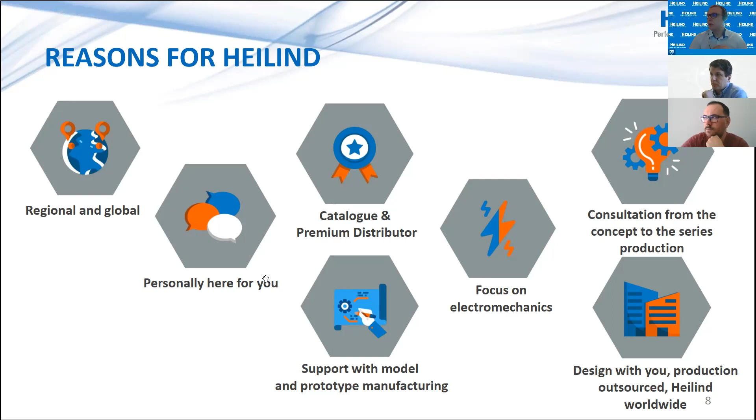We also support prototyping, so if you need any samples for your application, normally samples are free of charge. Let us know, and we will ship small quantities to our customers.

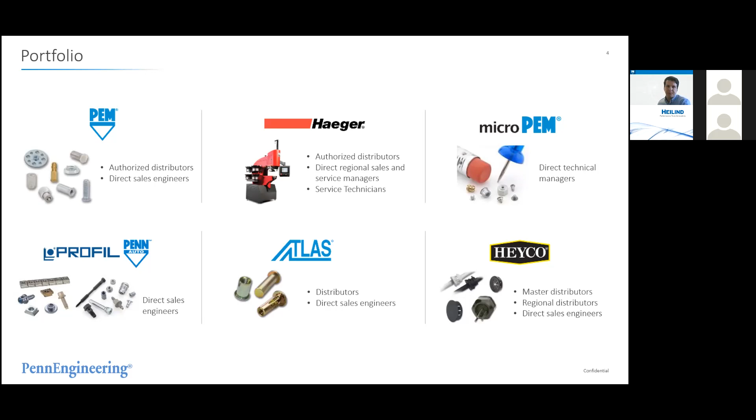The message here is really that we are a company that is very stable, very strong, with a strong focus on the customer. We are working and cooperating with the leading brands on the market.

We are constantly trying and developing new products. We are improving ourselves, looking at ways to improve total installation costs for our customers. We work closely with customers to identify solutions where we can reduce cost by replacing components or using better solutions.

With self-clinch fasteners, as you will see in the next slides, our fastener footprint is smaller compared to competing technologies. So we are also reducing the footprint in customer applications, which is very important, particularly these days where the trend is toward thinner panel thickness, meaning less space to install fasteners. Our fasteners are really the ideal solution for this type of challenge.

We also have a very high focus on environmental issues, with a dedicated section on our website where we show our certifications for various standards and requirements on the market, starting with ROHS, REACH, and other environmentally related issues. If you don't find what you're looking for, please let us know through our Heilind distribution partner or directly, and we'll address it.

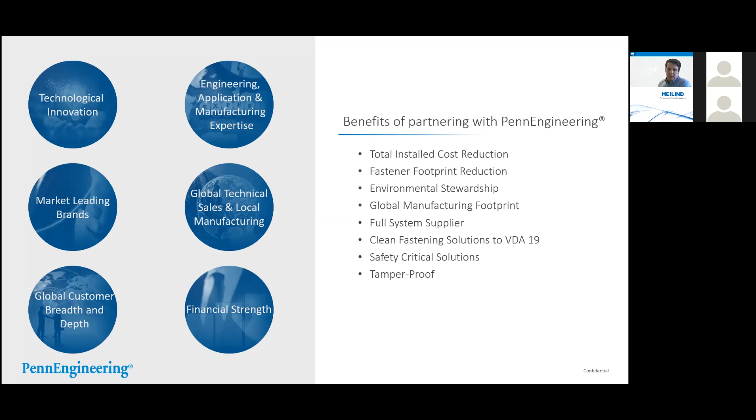Then we have automotive electronics, which is a very strongly increasing market segment at the moment, where pretty much everything in the current car is going in this direction. We have a lot of electronics nowadays in cars, a lot of touch screens, and we like that. We like this kind of gadget, I think every single one of us.

And basically, for all these new applications, we are supplying to those as well, and we are seeing, as I said, a tremendous increase in this type of market segment.

As I already mentioned, consumer electronics - the primary brand that we supply to is micro PEM, but it's not necessarily only micro PEM, because some laptops with a bigger footprint allow us to use other types of fasteners. Datacom is, again, a very strongly increasing market at the moment due to increased demand in telecoms and datacom services, purely because of the current situation in the world - a lot of meetings, as we have at the moment, have moved to the online world, and this has increased demand in switch, server, and router applications, datacom, big towers, and so on. So really, this covers everything there, and again, a very strongly increasing market segment.

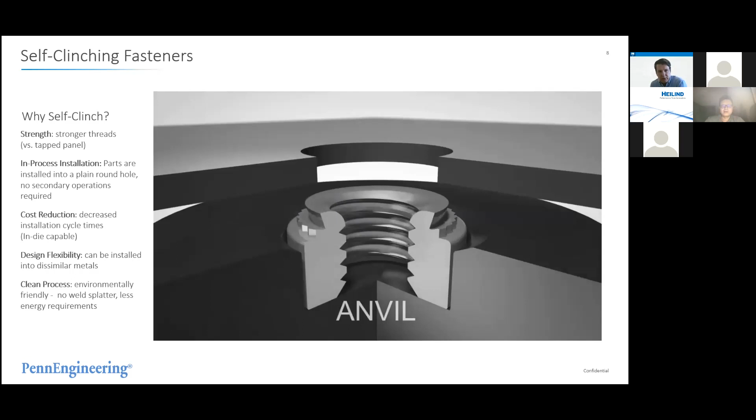You can automate the process, and this will significantly reduce the cost of our overall install cost. We have design flexibility, so we can install our fasteners into dissimilar metals. Again, that's an advantage over the competing technology of welding. And as I already mentioned, it's a very clean process. You have no additional elements going into the process. There is no weld splatter, less energy is required, purely what you need.

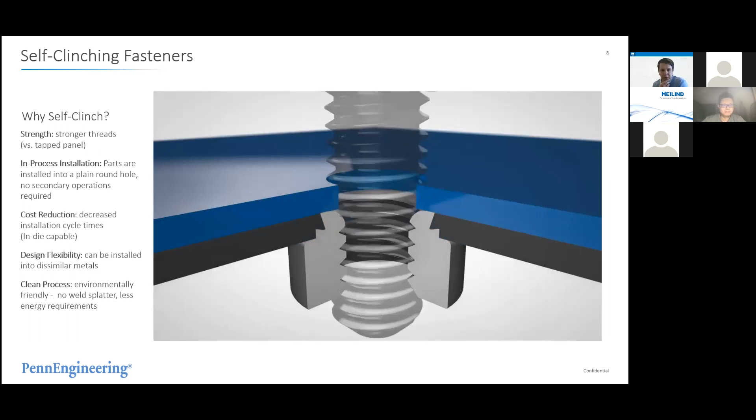The idea of self-clinch itself is very simple. You just apply the force and install it into the panel, and the material will cold flow, as you can see on the animation. So all the work is done by the material itself, as you can see here in blue in the animation. I'll start over.

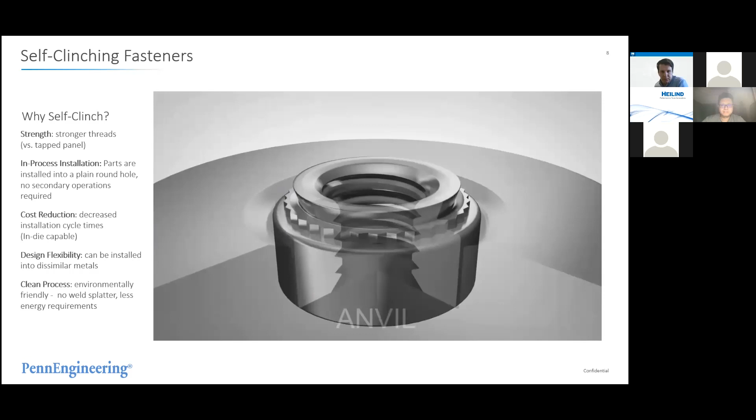So the installation process itself is very simple. You place the fastener, and then you can install it by applying the force.

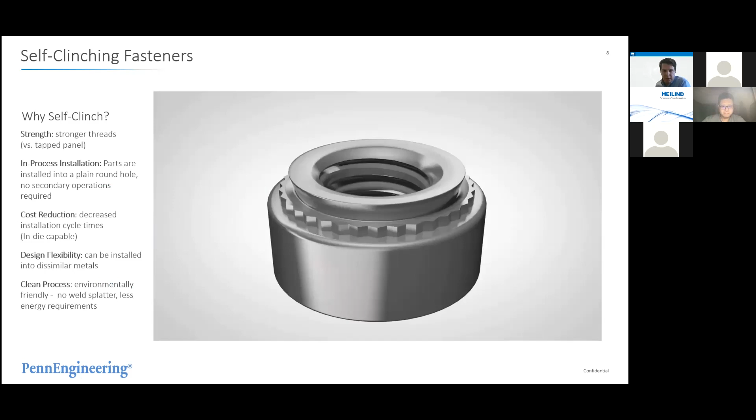Self-clinching, I will go very briefly through this. We're not going to spend too much time on the technical description of it. It's just to give you an idea and an explanation of how it works. So we have two main features of self-clinching or self-clinch fasteners: one is the displacer, and one is the undercut.

These are the features that we do not show on the 3D models, and we do not share information about their dimensions and shapes, purely because it's our know-how - we know the proper volume ratios between those features of the fasteners.

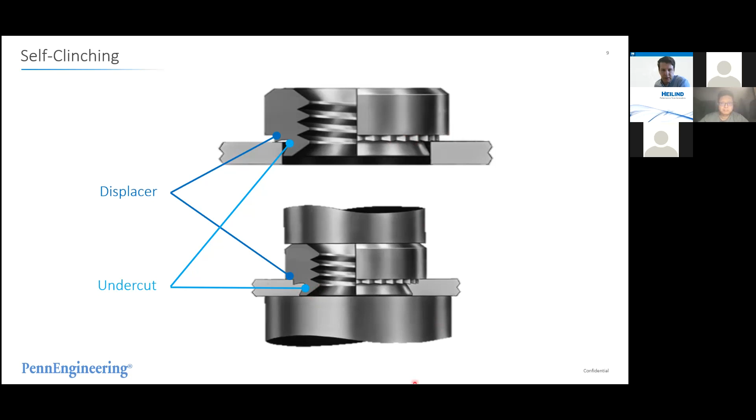Here you can see on this type of fastener, which is our S-nut, we have what we call a knurled or serrated ring, which provides resistance against torque, but we'll go through that in the next slide. So this is the design intent of the installation of the S-nut.

What we have here is how a typical joint is designed and how it works using the self-clinch fastener. As I already mentioned, we have a displacer and an undercut where the host material flows into the undercut after installation. This is the direction of the installation force. In PEM language, this is what we call the head of the fastener - the head is the portion above the panel where the fastener is installed.

And this portion is our displacer, or serrated clinch ring, that provides torque resistance. The tapered shank is another portion of the fastener. Here is the component or mating material, and the mating screw once it's tightened - that joint is in tension, and we have the desired design intent of the fastener.

An advantage of installing S-nuts is that it's flush from the other side of the panel, so basically you can have very nice surface-to-surface contact with the mating material.

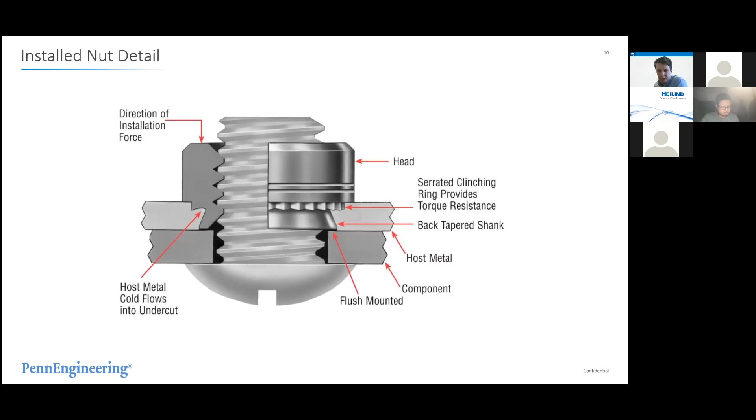I don't want to go too technical here, but are there any questions in relation to that? Is everyone okay? If there's silence, I'll take it as a yes and we can move forward.

Here is another big product group, which is our stud. A stud is our externally threaded fastener, and the principle is the same for every type of fastener we make. The self-clinch principle is the same - only the shape and type of fastener changes depending on whether we're looking at internally threaded fasteners, externally threaded fasteners, or whether it's a spacer or any other type of fastener.

So again, this is the design intent of the stud. As you can see, the shapes are different, but the principle is the same. We apply the force from this side or the other way around, depending on how you're installing it. In this case, there are two displacers - the head of the fastener and the locks - and these displacers move material into two undercut areas, one secondary and one primary. Again, this portion holds and retains the fastener in the metal or sheet.

Ribs or locks provide torque resistance once the fastener is installed. So if you are trying to twist the nut, this is what is retaining it and preventing the fastener from moving in the panel. And again, we have mating components, a mating panel and a mating component, which is the nut. And once we have everything joined together, we have the threaded joint.

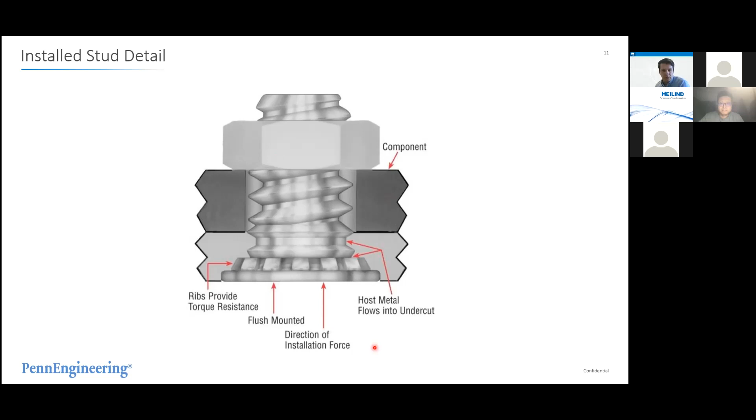And the last big group that we have is the standoff, and also the design intent of the standoff. So the standoff is probably the simplest one of all our groups. You won't see it from this slide. Unfortunately, I should have prepared better, but this is a hex head. Standoffs do have a hex head, and this hex shape of the head is the design that protects it against torque.

And this acts as a displacer, moving material into the undercut. So in very simple terms, it's probably the easiest one to explain, where we are applying the force. The displacer is moving material into the undercut, and that retains the fastener in the panel. And standoffs are really spacers between two different plates or planes. By the distance, we mean the body of the fastener, and it can be supplied in different lengths depending on the required distance between the panels. And we will tighten it with the mating screw.

So I think these three are the best explanation of the self-clinch theory and how it works, and give you an idea of how fasteners are retained in the panel. The reason why we picked those three is to show you the variance in the displacer design and in the undercut design, but the principle is the same for all three of them. So you can have variation of the displacer, of the design, the shapes and the sizes, but the principle remains the same, and the fastener is retained securely in the panel.

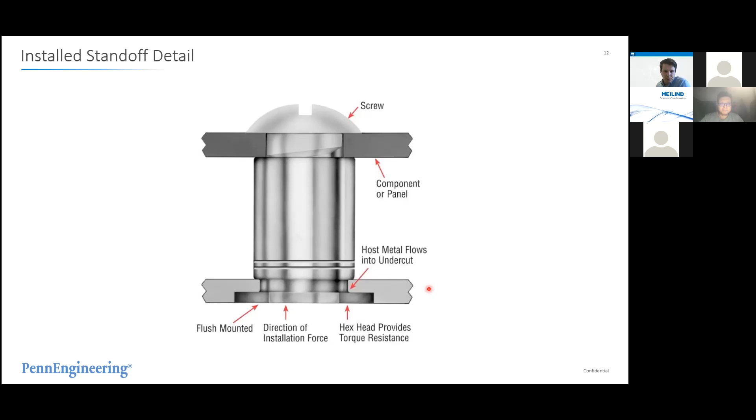Some major do's and don'ts, or some advice on what we should and shouldn't be doing to successfully install the fastener and make sure that the connection is correct. The general rule is the panel has to be softer than the fastener. The rule of thumb is 20 points on the HRB scale. The reason for it, and you will see it on the next slides, is that the fastener has to facilitate the movement of the panel. So it has to be harder, tougher than the panel, to make sure that it won't collapse or be damaged during the installation process.

We need to have adequate sheet thicknesses. This means that we cannot successfully install fasteners below a certain minimum value that we specify. We provide information about all parameters required to successfully install fasteners in our literature. If you have issues finding them, please do not hesitate to contact us or our distribution partners. We will provide this information because we want to make sure that the fasteners are installed correctly. So we need a certain minimum sheet thickness, and it purely has to do with the volume of material that we need to move.

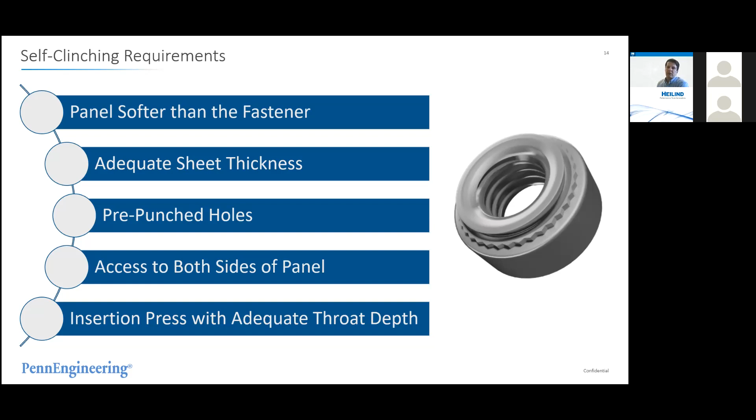Then pre-punched holes. Hole preparation is very important. We need to have clear access from both sides. It means that we need to apply force from one side of the fastener and have support from the other. It's again down to how self-clinch works and how the panel flows. If we have access only from the front side of the panel, then we would be looking at the Atlas style rivet products. And the insertion press must have adequate throat depth. It means that we need to make sure that the workpiece fits into the press. We will go through each of those steps separately.

So sheet material must be softer than the fastener. That's what we already said. If the fastener is not hard enough, it will crush or deform itself, and cold flowing of the material will not occur, or it will occur in a limited way. What will happen then is that the fastener will not move enough material, it will not be retained correctly, and in the worst case scenario it can fall out of the sheet, and that's an unsuccessful or incorrect installation.

In this case, really, we would encourage you, if you have any issues like that, talk to us, let us know what the issues you are seeing, and we might be able to help you. It can be as simple as using a different heat treat specification for our fasteners.

Also, I would like to highlight that some operations will locally harden a sheet. For example, punching 300 stainless steel or laser cutting a mounting hole. What do we mean by this? If you have an application using a 300 series stainless steel panel, if you punch the hole, the material itself is trying to protect itself, and it will harden around the area where we are punching the hole. This phenomenon is called local hardening.

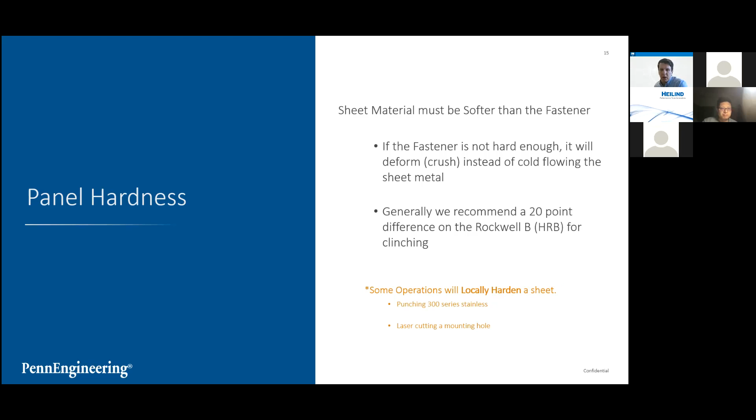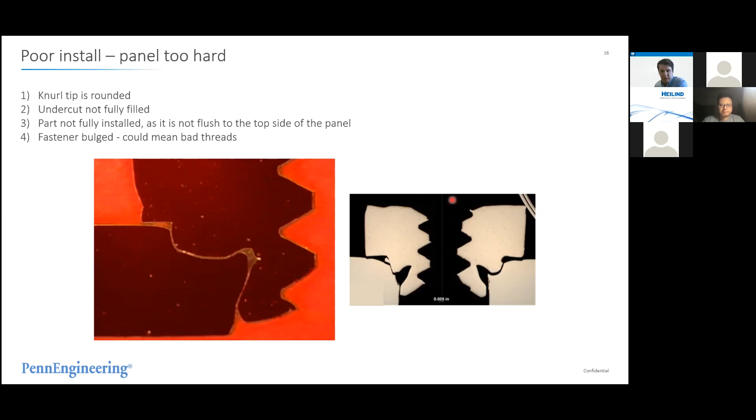So these are some of the issues that you can experience when not installing with the proper hardness or into a too hard panel. So we need to have a good match between the fastener hardness and the panel hardness. All these can result in bad installation, bad joints, and at the end of the day, a customer that is not satisfied and not happy.

Here are a few examples of how it can look. You can see the fastener before installation, where you have a very nicely defined knurl, and after installation when it's completely crushed or collapsed. And similar for the studs, where we have nice pronounced locks, and here they're almost completely flattened.

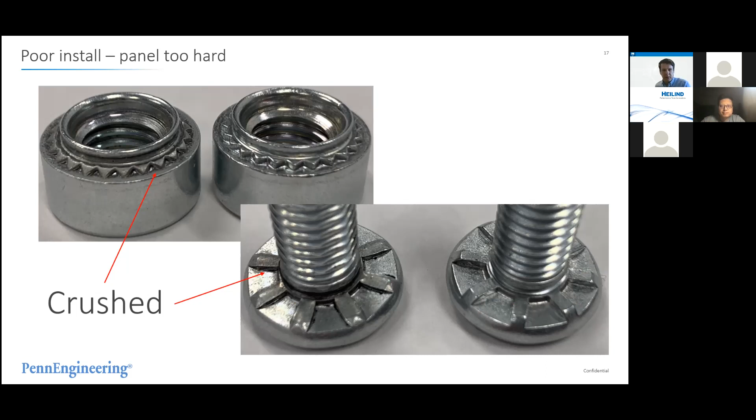So if you come across any issues like that, please let us know, and we are happy to investigate. Or we advise using the correct panel hardness or fastener specification. To let you know, we do control our manufacturing processes very tightly. Each of our batches has its own hardness record, so we can review if in any particular case there was any potential issue with the hardness on our side. So do not hesitate to let us know.

Sheet thickness is another critical factor for successful installation. As I mentioned, most of our standard fasteners have minimum sheet thickness requirements. This is really to ensure that the fastener has enough volume to move, to make sure that the installation is correct and the fastener is retained in the panel correctly.

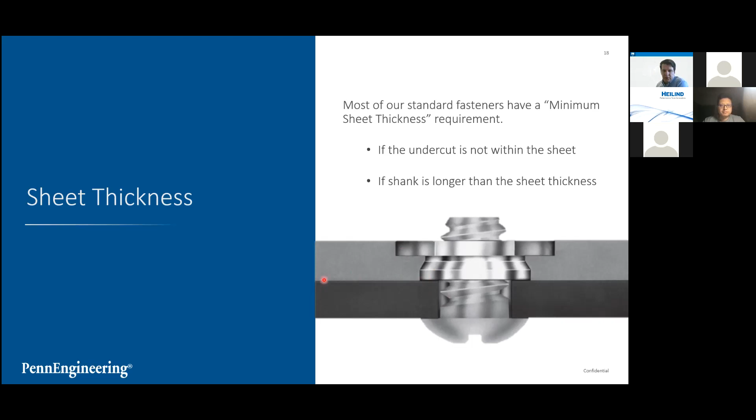What could happen is that if we don't have enough material, the undercut is not within the sheet, so the undercut will be outside the sheet, meaning that it can't receive any material. And if the shank is longer, it can potentially protrude from the other side of the panel. So we will lose the advantage of having nice face-to-face contact with the mating component.

Punched holes. This is another critical factor. What we are advising customers is to install our fasteners from what we call the punch side. Most of you who are working with sheet metal, I'm sure, will know about this phenomenon. Typically 1/3 of the panel thickness is controlled. So the specified diameter D is controlled on roughly 1/3 of the thickness of the sheet.

After that, it's a tear. So basically we are tearing material, and this is uncontrolled. I don't want to say controlled, but it can be somewhat alleviated with tight control of the punching dies and punches. However, it cannot be eliminated completely. And what we are saying here, this diameter from the punch side is controlled. We know its diameter. From this side, it's uncontrolled. We won't be able to control this. And where possible, we advise our customers to install the fastener into the punch side of the sheet.

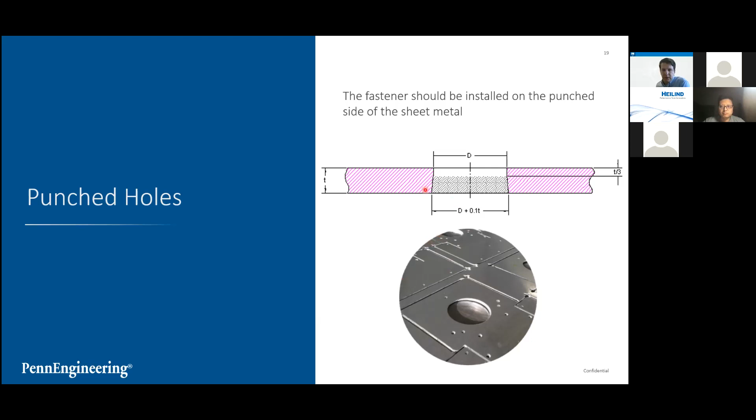Again, it has to do with the material. It has to do with the material and the volume of the chassis and material that we need for undercut. If we have a bigger diameter, you can see there is increase in diameter. We wouldn't have enough volume to install successfully.

Centerline to edge is another very important characteristic that we do publish. It's basically distance from the center of the hole to the edge. What could happen is the fastener, when we are installing, it's called a hoop stress, where everything is moving towards the center of the hole. However, if we are too close to the edge, material, instead of flowing to the center, will flow outside of the panel. And this means that, as you can see, we wouldn't have material to flow into undercut.

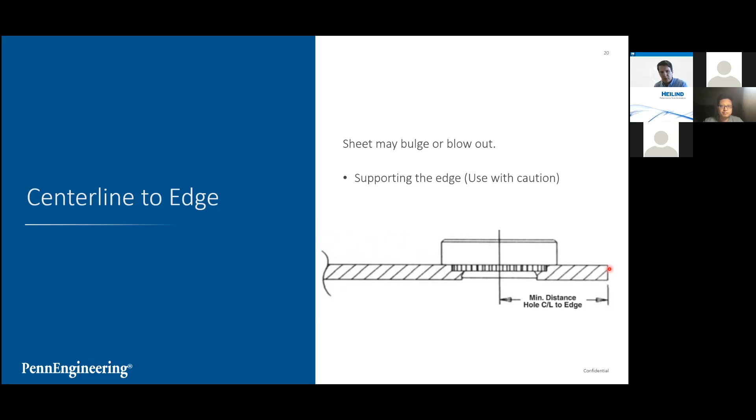So there are several ways how to prevent it. The obvious one is to install within the centerline to edge distance. But if you have applications where we don't have any potential to change the design, we might look at the installation equipment that will support this edge and will kind of prevent material from bulging. But I advise, based on my experience, to review on a case-by-case basis and make sure that it works for your application, because it's not a cure for every solution.

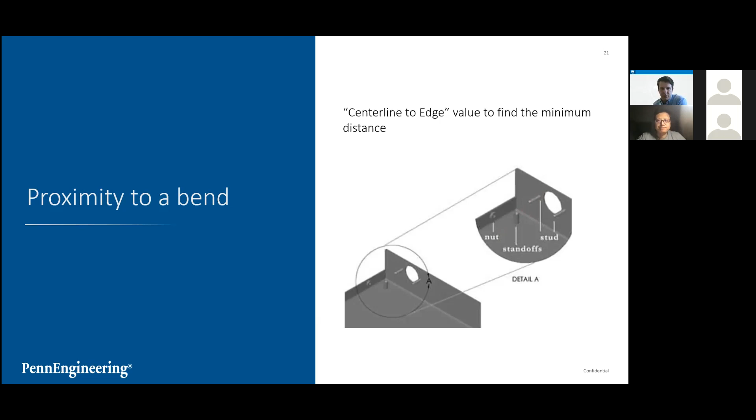And similar to the centerline to edge is the centerline to the bend. We need to be sure that the designer considered all the potential issues with this type of installation. One is the spacing of the fasteners. As you can see, if we are coming too close, we might not be able to install one of them. Another one has to do with a similar phenomenon as we see for the centerline to edge distance: not enough material. So we need to be careful as well with proximity to the bends. Again, we are not saying it's not doable, just special considerations need to be taken.

Also, if possible, bending should be done before installation. Why are we saying that? If you imagine you have a panel in the flat condition, and we successfully install the fastener, then we bend this panel over, the bending is moving material away from the undercut. So whatever we packed or pushed into the undercut area, which is holding the fastener, we are taking it away. So again, just a special consideration for this type of application.

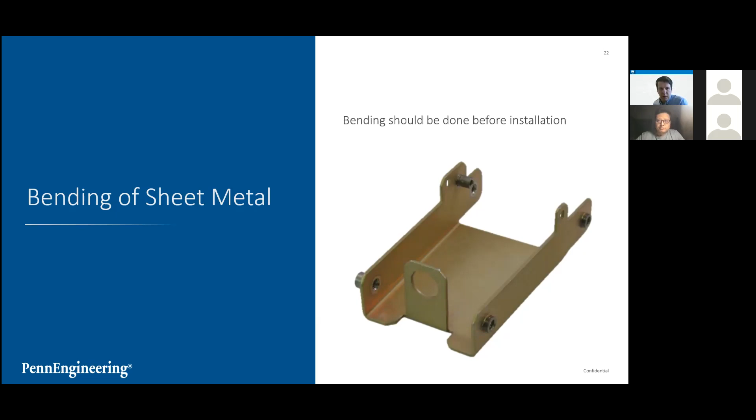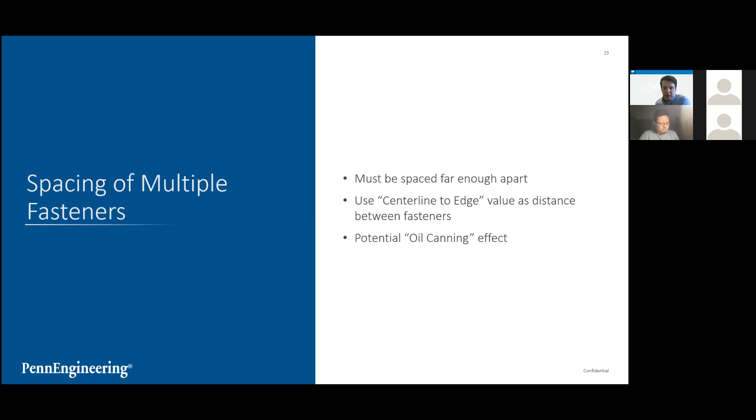Spacing multiple fasteners is a similar issue as centerline to edge distance. Same rules apply as for the centerline to edge values. If we have several fasteners close to each other, we might see a similar issue as installing a fastener close to the edge, and we might not have enough material. And again, use the same values as the centerline to edge distance. There are several ways to tackle this type of issue. We can try to do the installation at the same time, so the material wouldn't have enough time to decide where it wants to go, so we are doing everything in one stroke. But again, another consideration that needs to be taken when designing and installing fasteners.

How we can address centerline to edge distance issues is we have fasteners with a custom design really to address this type of issue. There is a trade-off, of course, because we are reducing the footprint of the installation and the self-clinch features. There is a slight reduction in the performance values. However, if the customer has no other way than to install those fasteners close to the edge, in most cases that we work with, it's sufficient. These types of fasteners provide enough performance for this type of application.

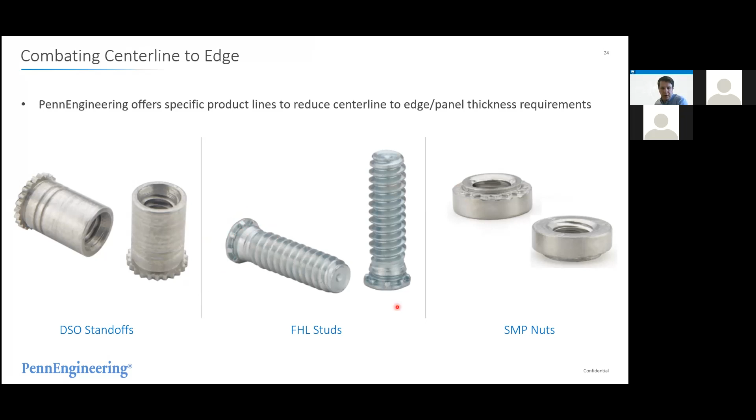And one type of fastener addressing it is the DSO standoff. Instead of having a hex head fastener, we have round head fasteners, which due to their shape allow us to install them into holes close to the edge, and the knurled head provides the anti-torque feature. And then we have FHL and SMP nuts. These are, in principle, standard parts with a reduced clinch profile. As you can see, the head diameter is slightly smaller, and the clinch profile for the SMP nuts is smaller as well, to make sure that we are not moving as much material and addressing those issues.

Another big one is impact installation. A clinch fastener cannot be installed with an impact blow, like a big hammer. It's a bit of an exaggeration, but trust me, throughout my years at PEM I did see some customers install it with hammers.

The reason for it is we need to allow the fastener material to cold flow, so we need a certain dwell time. Even if minimal, it still needs that time to cold flow. With an impact hammer or any other impact delivering device, we won't be able to create that dwell time, and it will not have time to cold flow. Then we can either destroy the part, damage the workpiece, reduce performance, or whatever issue is there, you can impact with this type of installation. So where possible, use a device that allows certain dwell time, not a hammer, please.

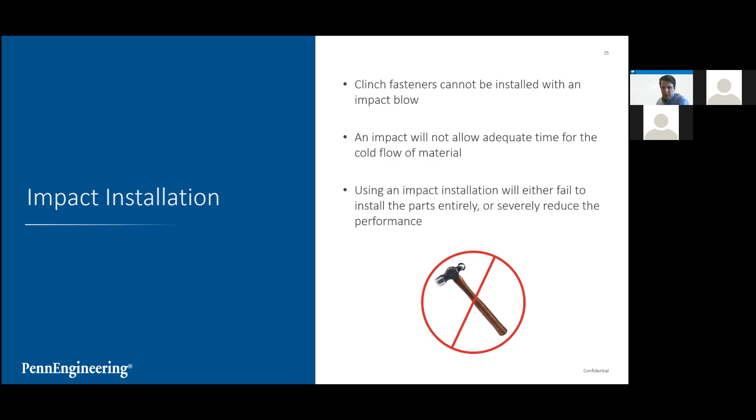In terms of material and finish, there are several considerations, including not installing a fastener after paint or powder coating. The reason is either process, paint or powder coating, is a very heavy, thick type of finish. If we are installing a fastener into a panel or chassis that is powder coated or painted, we can run into issues where the hole is reduced because of the size of the paint, if the designer didn't allow for the hole diameter to be the right size after painting. We wouldn't have enough hard material, enough panel, enough steel to move into the undercut, and literally the paint or powder coating would be holding the fastener in the sheet, which I believe you'd agree is not ideal.

Anodizing complete aluminum assemblies may cause slight color differences. Again, this is based on experience. If you have any application where aesthetics are important, the anodizing process will cause discoloration of the fastener. So it's not so much an issue with the fasteners themselves, though if you are too aggressive in anodizing you can eat some of the aluminum from the self-clinch, but typically the main issue is the color difference between the fastener and the panel. So I would pay attention to this if you have any aesthetic requirements for your application.

In terms of performance testing, how we test our fasteners is the push out test, where we test how well the fastener is retained in the panel. We apply an axial force to measure how much force it takes to push the fastener out of the sheet once it's installed.

Here you have a typical depiction of our fastener and of our testing, how we do testing in-house, and how we recommend customers test the fasteners as well.

Very recently, two weeks ago, I had a customer who was testing them with a hammer, and he told me they're failing. I wasn't sure how they installed it. They were just saying that they're failing and falling off the sheet. We did all the testing for them, and at the end, when we submitted the report and showed our testing specification, they said that's not how they tested - they tested with a hammer. So that's something we strongly recommend not to do, test with a hammer.

There are a few reasons for this. You don't know the force you're applying, it's an impact force, and you can't really control it, among several other issues. So please use some sort of device you have, like a compression tester, to test, or leave it to us. We do not hesitate to support you with testing to make sure our fasteners are used correctly and perform as specified.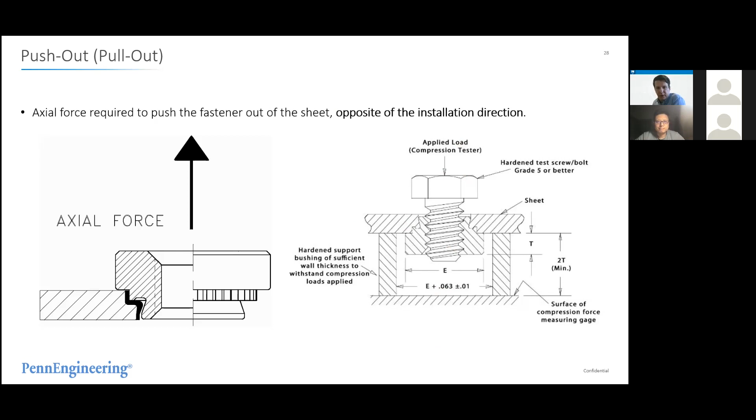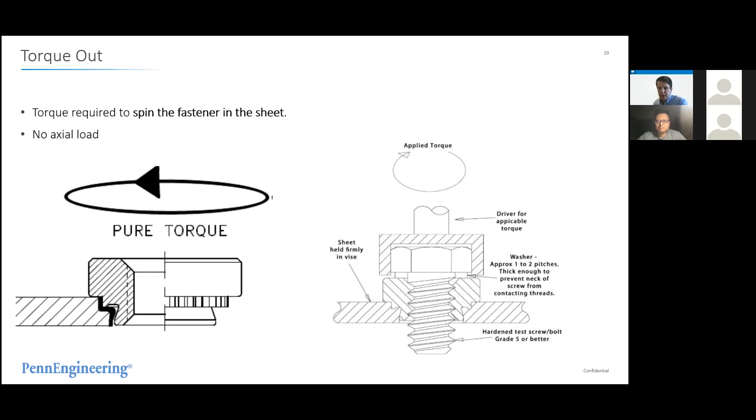We are not in control of customer processes. We are not in control of the mating screws that we do not supply, and hence we recommend customers test our fasteners with the tightening torque. We have certain recommendations, but please bear in mind these are just recommendations.

Okay, let's continue on the application review and a few examples of where to use our fasteners and how we work. In terms of the stats we did review, studs are one of the three biggest groups that we are supplying in terms of applications.

We have several types of studs, as you can see on this slide. These address different or specific requirements that customers might have, and that we felt the need to have as a standard. One of the most common types is the flush head stud, which is a very straightforward fastener that can be installed into aluminum or cold rolled steel with the appropriate installation considerations.

Then we have FH4 and FHP, which are the same type of stud but targeted for installation into 300 series stainless steel panels. These are for applications where the customer needs a flush surface after installation for aesthetic requirements. Then we have FHL or FHLS, for applications close to the center line to edge, as we discussed previously.

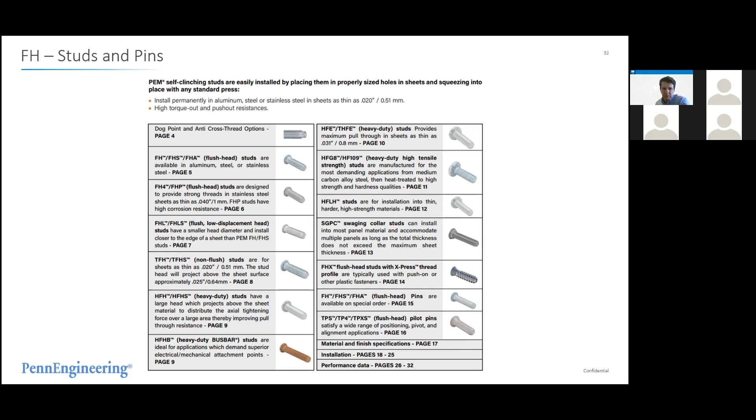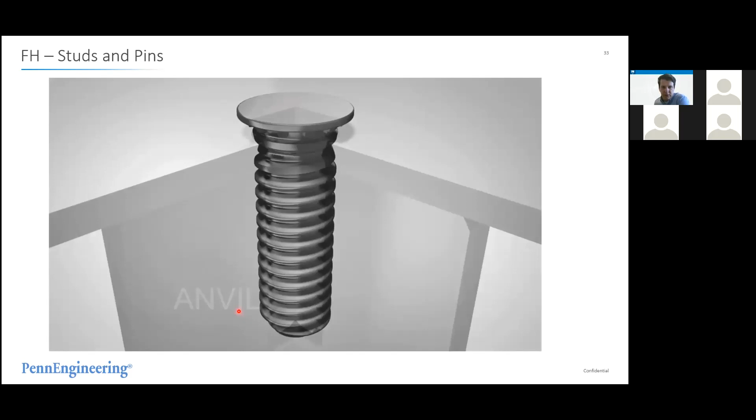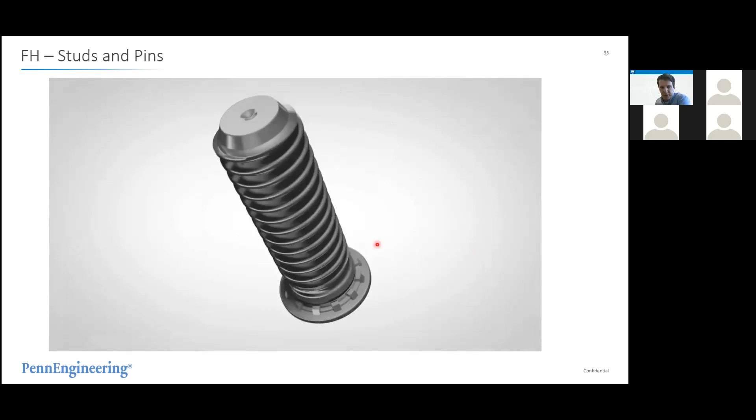So the stud, if we are presenting it to the panel—preparation of the installation equipment, and then Rafael with the laser pointer. This shows how it works and what we're doing with installation of the stud, applying force as we discussed. The material does all the work, so we're just pushing the fastener into it, and in the blue area the panel is flowing into the desired areas, and we've successfully installed the fastener.

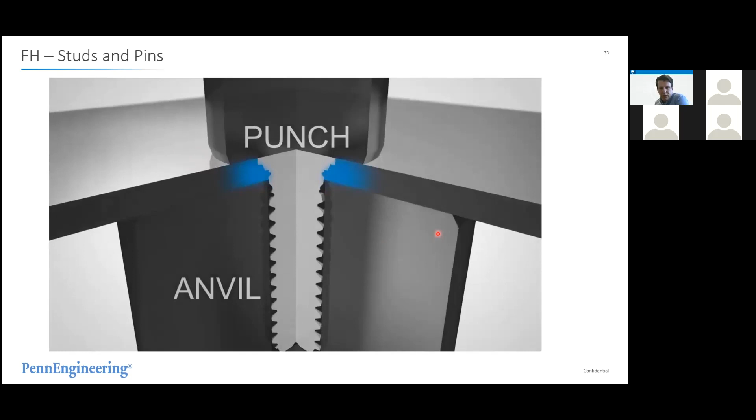In terms of tooling, installation tooling is designed to suit this type of fastener, so each type of fastener has its own unique type of tool. There are countless applications where you can use our studs, and we've picked just a few of them to give you a flavor of where they can be used.

This one is for an electronic scale, and what we have here is a stud installed into the panel. As you can see from the other side, the customer has a requirement to be flush or flat after installation. So from this side, what you can see are our studs installed into this chassis.

From the other side, the flush installation allowed customers to put protective covers or whatever they needed, like plastic with numbers or buttons to navigate the menu and selection. Using flat flush studs allowed us to address customer requirements for a cosmetically pleasing finish. This type of product was installed together with standoffs, and the touchpad was completed afterwards by the customer, meeting their requirements.

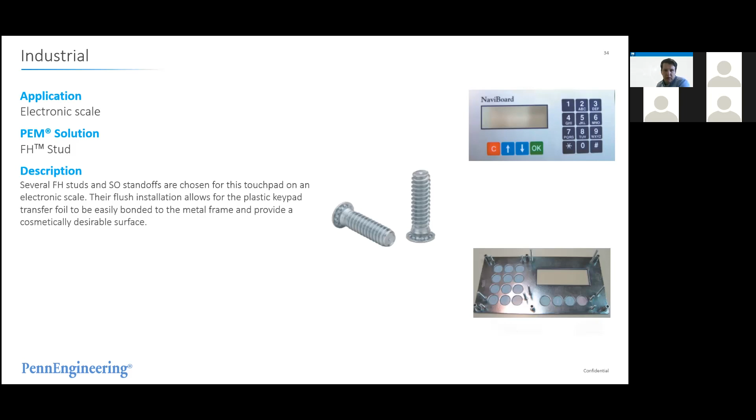Another type of application is automotive. This is for torque converter rings, where we applied and used the HFH stud. In this particular case, it was an HFH M10 thread with a special 1 millimeter pitch, used in the torque converter for automatic transmission.

The customer came to us asking if we could streamline and reduce cost for his application. So we did a series of testing. At the time, the customer used 8 weld studs. After extensive testing with our studs, we were able to replace 8 weld studs and nuts using 4 PEM studs, reducing the number of required components by half.

We were able to reduce his overall cost for the installation process, which was welding, and we accelerated his lead time. This yielded a 50% cost advantage over the entire project for the customer. Saving a customer 50% on cost is very significant, and purchasing people love that - it's a win-win for everybody.

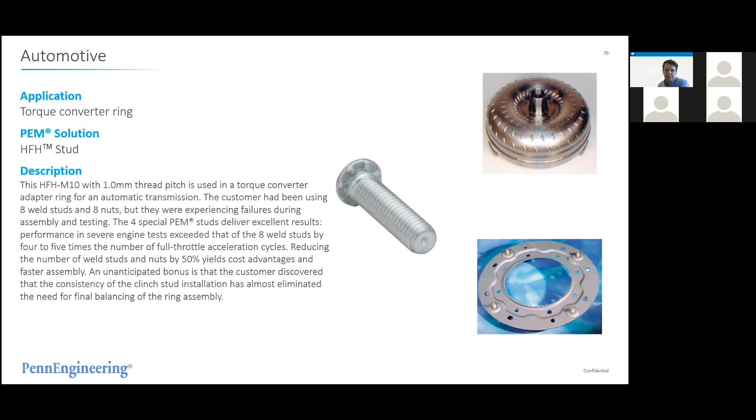This is another application for the industrial market segment, where we used our FHL, a centerline-to-edge close solution for an electronic scale. The customer required a fastener that could be installed into a very small footprint - as you can see, it's a very narrow space. Our standard FH wouldn't be able to install there the way our FHL fastener is capable of, purely because of cosmetic requirements. We would see bulging here and on this side, and installation access would be problematic as well.

By using the FHL product, the customer was happy with the performance. The customer accepted a slight reduction, but it was still way over whatever he required. We were able to install and clinch this fastener as close as 5.6 millimeters from the centerline to edge, which is pretty phenomenal for an M5 stud.

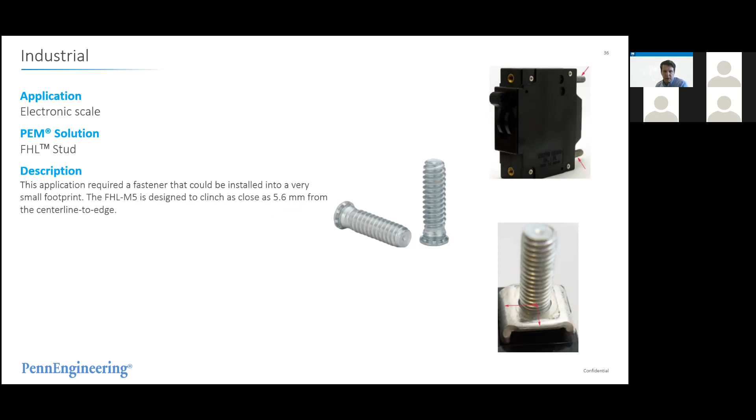So if you come across any challenging applications where you have difficulty installing or applying internal or external thread, or a spacer, let us know. We can look into it, and I believe we can address those with our technical team. Another big group of fasteners, with a few examples of application, is the S-nuts.

Again, we have several different types of S-nuts, following the same logic as for the studs - to address different materials and different challenges out in the market. The biggest group is the standard S-nuts, the S-nut CLS. CLS is manufactured from carbon steel, stainless steel, and aluminum. These provide long load-bearing threads in thin sheets with high push-out and torque-out values, as we've discussed previously. So if a customer requires a reliable, hardened thread in a thin sheet application, the S-nut is an excellent choice for them.

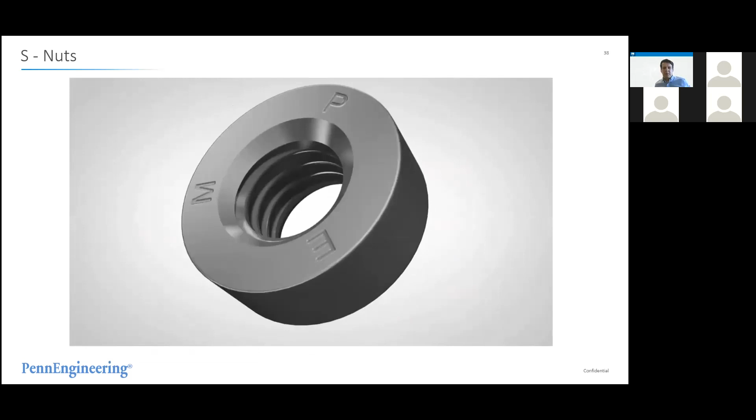SP nuts are our response to the challenge of installing into 300 series stainless steel, similar to what we have for the FP and F4 style fasteners. RT is relatively new - it's a special locking nut which locks when clamp load is applied. Typically the market has a solution for clamp load.

For clamp load, the market typically uses adhesive, nylon rings, or other components that would have the locking feature.

With this type of nut, our engineers designed and developed a special shape of thread called RT thread, that's where RT comes from. This allows the fastener or joint to be locked once the joint is in tension. So once we apply the mating components, it will lock itself, and we have a very nice vibration-resistant feature. This is provided without any additional elements in the RT free-running lock nuts.

A more traditional way to address locking is applying what we call a TRI-DENT. Basically, it mechanically deforms the first thread at the entrance, and this provides the locking feature to meet the 3-cycle locking performance requirements, which are industry standards.

And then we have H and HNL, non-locking and locking nuts, with high push-out and torque-out resistance.

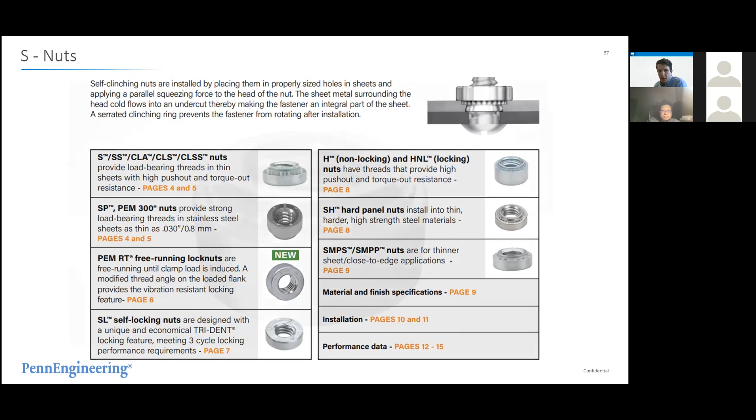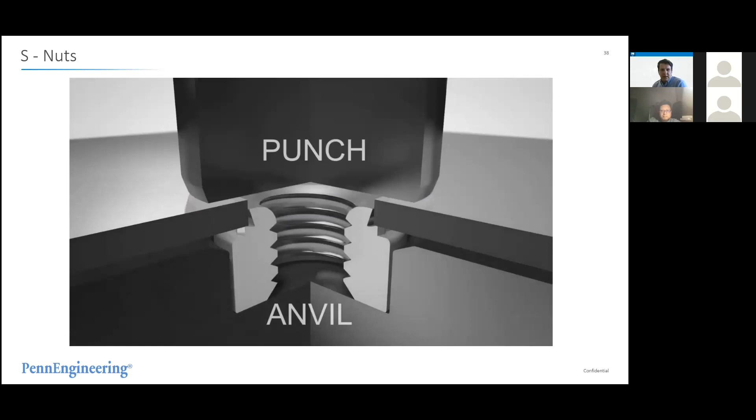As for design intent, you've already seen this on our previous slides, but repetition is the mother of wisdom. So we'll see again how the blue area of the panel will cold flow and retain the fastener. We apply the mating components and the joint is complete.

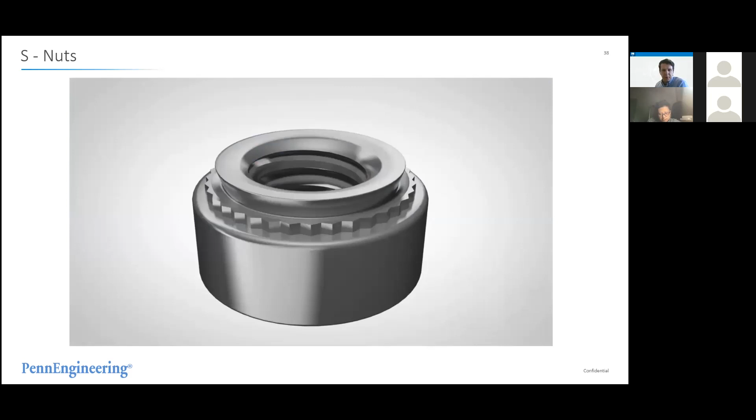Here are several applications showing where you can find our nuts, though these represent just a few of the countless solutions we've offered throughout various industries. This particular one is for the automotive industry, for the armrest, where we installed our fasteners. As you can see, this is the shape of the bracket which supports the armrest, and we have several fasteners to fix the position.

Self-clinch was selected over welding, where we provided a solution over competing technology. Welding is a concern for aesthetic reasons and accuracy, whereas it's much more convenient to install those fasteners using the installation process we recommend.

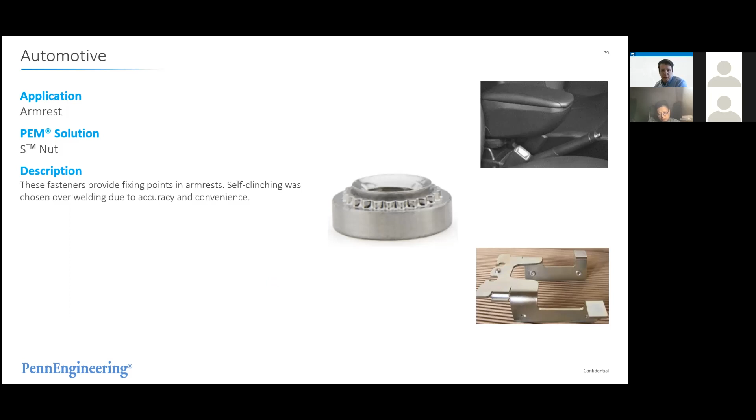F nuts are a specific type of S nut. They are still internal nuts but provide flush installation with the sheet. These are ideal wherever we are competing, or where a customer has demand for a strong thread, heat-treated thread, or hardened thread against a typically used tapped hole. This is where we would recommend and select this type of fastener.

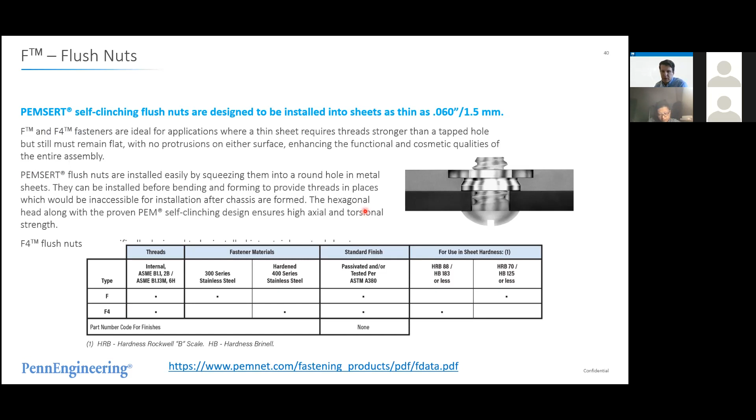It's a very aesthetically pleasing solution. We have several applications where our customer had a demand for it to be flush, and we were able to address that with this type of fastener. The principle of installation is the same as any other S-nuts or standoffs. Here are some examples of where we can use it.

This particular one is for food service, for a display case with a sliding door, and for the wheel assembly, as you can see placed here. For this application, the customer requested M5 F nuts, and we were able to provide them. If the customer had just tapped the hole, the thread wouldn't be as strong as using one of our heat-treated fasteners. This allowed the wheel assembly to be flush so it can slide freely in the door frame, and due to the space restrictions we had, that was the ideal solution for the customer.

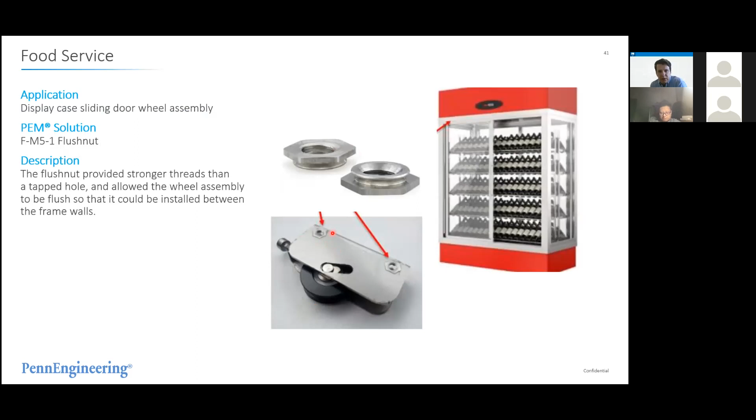Other fasteners we can provide are miniature fasteners. These are not in the PEM micro category, but what we call miniature—typically smaller than standard style fasteners. We offer both locking and non-locking versions, depending on whether the customer has any requirement for prevailing torque, lock nuts, or preventing mating hardware from loosening. If there is such a requirement, we would recommend either locking or non-locking. These fasteners are predominantly used in minimal space where the customer has restrictions on how much space is available to install the fastener.

Again, it's just a variation of the S-nut, and the self-clinch principle is the same. This just gives you an idea that we are not only limited to the fasteners presented before—our portfolio for standard parts is over 7,000 different part numbers, and for special parts it's around 4,000 and above.

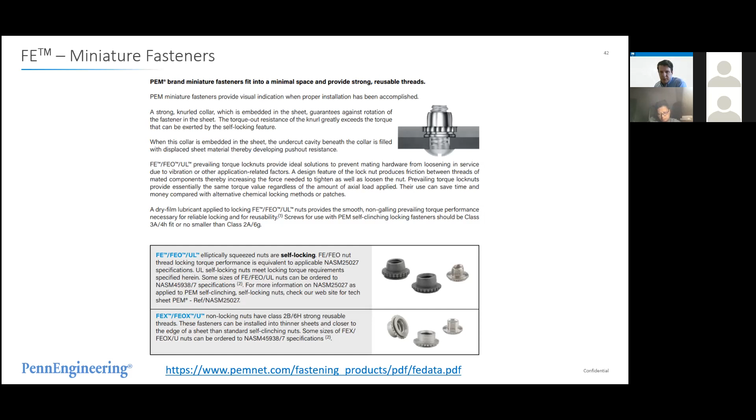So in our portfolio, we have over 11,000 different styles of fasteners. And I believe from those 11,000, you can find a solution for most of the customers. If not, we can always look into specials. And these are just an example where we used the FEO locking nuts, or miniature lock nuts.

And again, as you can see, the customer's panel here is relatively small. We do not have much space there. Using conventional S-nuts would take even more space than the current FEO solution did. So we were able to provide this type of solution. And again, we helped the customer to reduce the loose hardware and provide a locking feature.

The customer's material was hardened, and the customer didn't need to have a tapped hole, which was an unreliable thread. So overall, it was a win-win for both companies, for us and the customer, where we were able to match the right fit for his requirements and for his application.

Another big group of our fasteners, which we already mentioned, is our standoffs. Again, the selection of fasteners is not as rich as on the previous types. However, we are addressing customers' demands and needs. I don't want to spend too much time on it. And I also want to comment, do not be scared of all the abbreviations, SO, TSOs, S-nuts, and so on.

If you have any applications, let us know what you're looking for, a brief description, and then we will try to identify the part numbers. I know for me it comes naturally, but don't be scared by it. It's a different type of application, and we will guide you through the entire process. Or Dominic and his team, I'm sure they are happy to provide support for this type of request.

So as you can see here, we have two types of standoffs. One is through threaded, or through hole, and one is blind. This selection is purely on the customer and his requirements and demands. If the customer has any need to be sealed from one side, then he selects blind threads. If the customer has a spacer and needs to use longer screws in mating components, there are several aspects coming into consideration. We would select, or the customer would select, through hole.

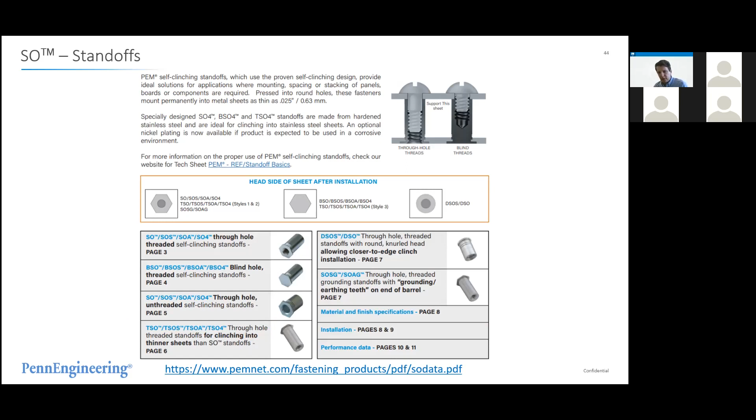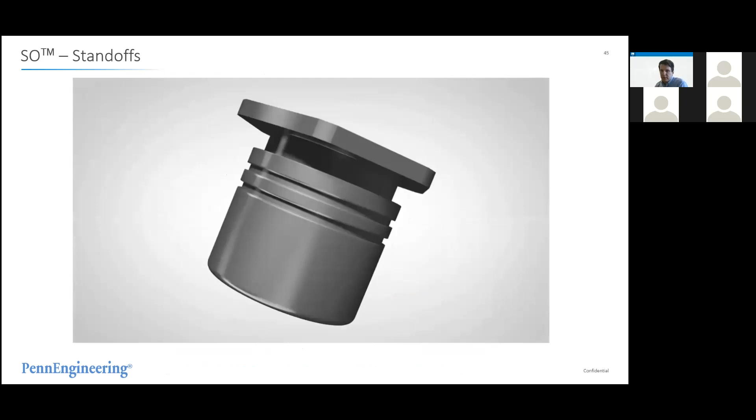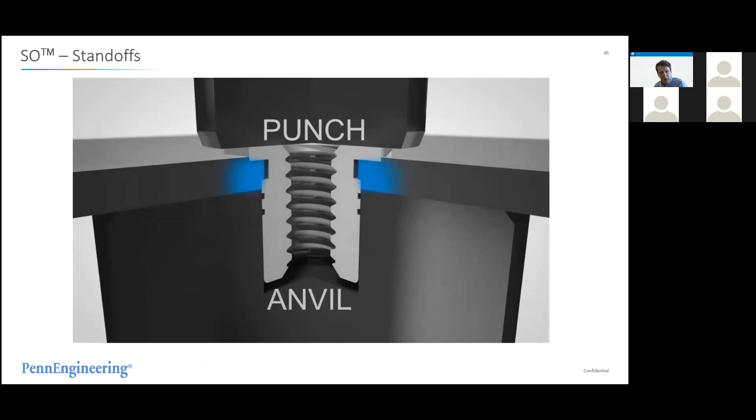And then we have fasteners for thin sheet, which are TSOs. Again, not going through it in too much detail, but there are several different types to address different issues with the customer's design intent of the installation. The principle is the same, as I said, across the board. Really, applying the force, material will flow, and as you can see in the blue area, the panel will do all the work by applying the squeezing force, and we can apply mating components.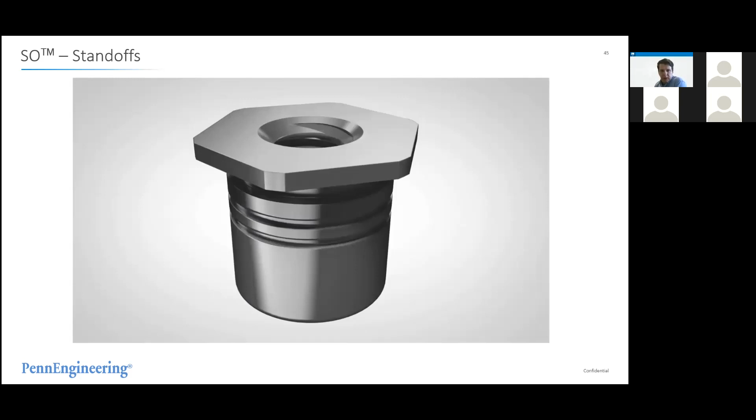The original design from the customer was a combination of plastic snap-in fasteners and loose hex spacers. So this type of process required hand assembly, and we selected together with the customer SOA M4, one of our standoffs, and this simplified and purified the design and reduced the labor cost necessary to attach the heatsink to the chassis.

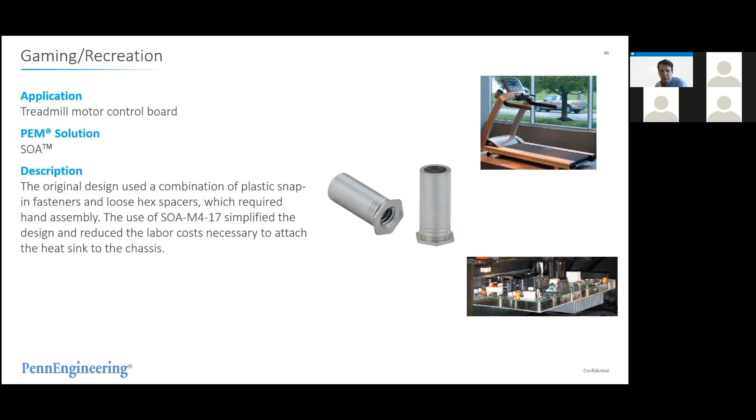So we simplified the entire process for the customer, and this is something that the customer values a lot, where they are able to see that they save some space on the boards, where we are able to save them on labor-intensive operations, and make sure that our designs are meeting their demands. So this is one of the examples of how we are able to help customers get better applications.

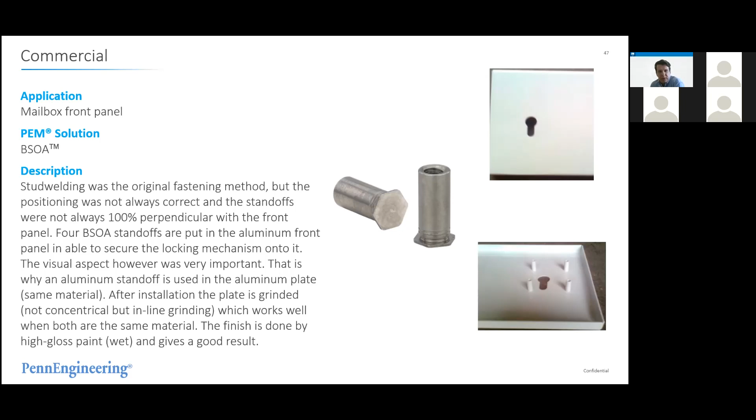You don't see any issues there. Panel after paint is nice and flat. You don't see any marks of our parts. And we use the same material, so aluminum and aluminum, which gives us a big advantage for the customer. And basically everything worked out well for the customer, and the result is excellent in my opinion. And our fasteners were able to meet everything that the customer needed from our side.

Just one point that I would like to highlight is that PennEngineering, and I mentioned it at the beginning, is not only a commodity supplier. We can walk through the entire process from design to mass production, and we can work with each member of your team from purchasing through engineering, through production, design, you name it. We have dedicated teams that can connect with appropriate teams, and through our distribution partners, we are able to communicate, and we do provide solutions for all of them.

The more details you give us about the panel material, about the application where you want to install it, how it's intended to work, the better solution we can offer. If you can give us this information up front, better for us. We are able to make an educated decision about what we are going to offer to you. And it goes from specials through standards as well, because there are instances where customers selected incorrect standard fasteners just purely based on the lack of information or lack of due diligence done on either the customer side or fabricator side. It's not to put the blame, really, it's just to make sure that we are supporting our customers with design.

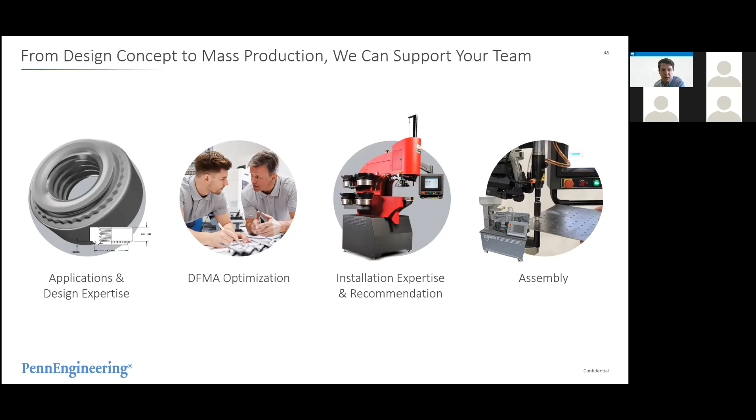This goes hand in hand with the installation expertise and recommendation. PennEngineering owns the PEMSerter brand, which is the in-die solution, and PEMSerter Series 4, and Haeger installation presses. So we know how to install our fasteners, and we can make appropriate recommendations for your installation. We have installation experts in each of the manufacturing locations in Europe, Asia, and the States. And also we are helping customers with assembly solutions, from fully manual installation to highly automated assembly solutions. So really, we are not only a commodity supplier, but also a full solution supplier.

This brings me to the conclusion of my presentation. And if you have any questions, please let me know. Do not hesitate. Anybody?